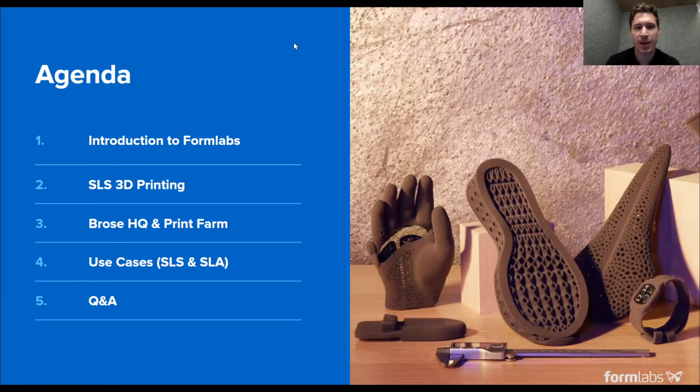Formlabs as a company, we are a global manufacturer of SLS and SLA 3D printers. We also manufacture all of our own resins, as well as some post-processing equipment. We started in 2012, and since then we have grown into a 135,000 install base, 40 plus materials, with a lot of parts being printed off of those. We have over 800 employees and offices all across the globe.

I'm based in Boston. We also have offices in Berlin, Budapest, and then a few in APAC.

A quick highlight into the current 3D printing portfolio. For those that may not know, we did recently release the Form 4 and Form 4B, our latest line in the stereolithography or SLA printers. We also have a large format SLA printer, as well as the associated washing and curing stations, which you need for post-processing for all sorts of end-use parts.

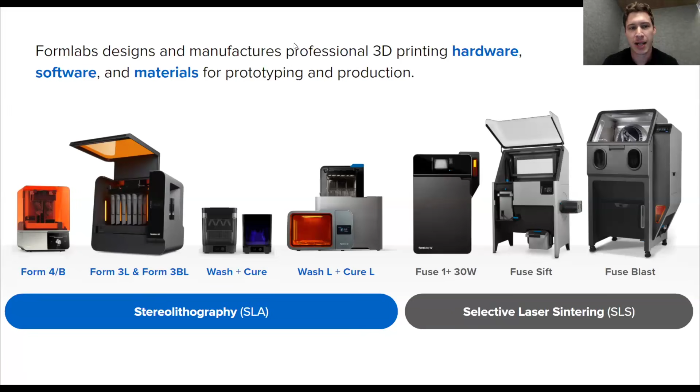On the SLS side, that is where we have the Fuse 1+, our SLS 3D printer that utilizes nylon powder. Then we have the Fuse Sift, which you can use to recycle, reuse, and reclaim your powder, and a Fuse Blast to get clean-to-the-touch parts every single time in about 15 minutes.

There are 3 main technologies within 3D printing: SLS, SLA, and FDM. I'm sure most of you have seen an FDM printer in the past - that is your filament extrusion, direct drive printer where you're producing all sorts of parts.

SLA is where Formlabs first made its name back in the early 2010s with the Form 1. That is your UV cure process utilizing a photopolymer or resin. We are printing ours upside down to get your end-use parts.

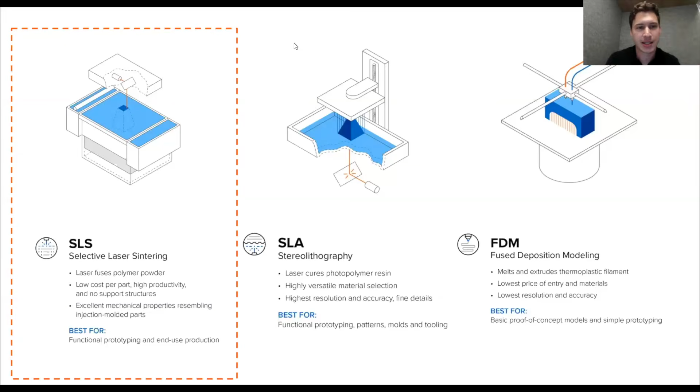SLS, which is what Matthias will be talking about in some of his parts, utilizes nylon powder, which is a thermoplastic. We use a 30-watt laser to basically preheat it and then add just enough energy so very specific areas and sections can get melted, sintered, and then hardened into very high accurate and repeatable parts.

When it comes to use cases, what you can do with each technology - obviously every single technology has its specialty, its use case. I think the best additive labs will have a mix of all 3 technologies. FDM, very quickly, is for basic prototyping and hobbyist applications. As you get into the SLA and SLS materials, you do have more certifications when it comes to biocompatibility.

If you're looking to do something for, say, surgical guides, or if you're trying to make a denture model or anything that requires direct contact with a person, that's where those certifications matter. As you grow into more of the engineering-based materials, that's when you are looking into functional prototyping and now production parts. So with that segue into production parts, I would like to introduce Matthias from Brose.

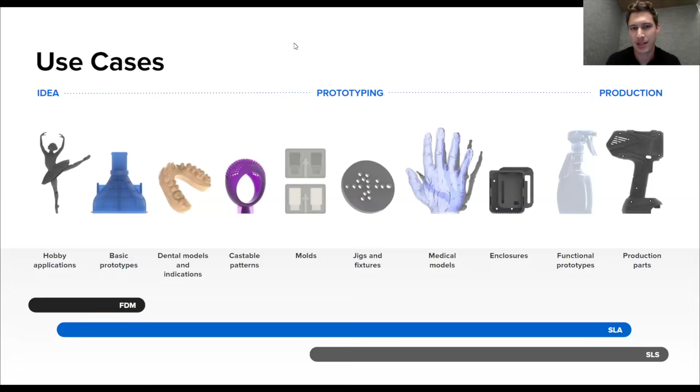Take it away. Yeah, hello everybody, thanks for having me. So quickly to my person - I'm with Brose for a little over 15 years. In my current role, I'm responsible for the seat prototyping of the North America region.

With that being said, in prototyping we have to, of course, go with the time, so we have additive technology here - this also falls under my umbrella. At Brose, we do have our headquarters for additive technology actually in Germany, where our general headquarters is also located. In that facility, we do some R&D work with the technology.

We're leveraging 3D printing a lot over here to reduce cost and time of manufacturing. We use that technology for prototype parts as well as for some serial production parts.

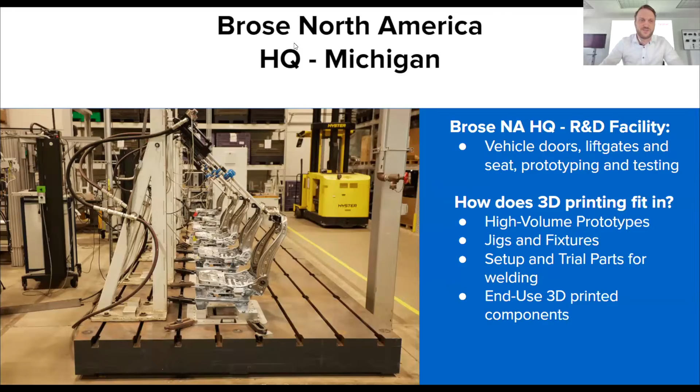I'm going to walk you through each one of them now. If you have questions, feel free to add them. Like Chris mentioned, one topic I won't answer is cost, so I hope you understand. Besides that, every question is very welcome.

When it comes to SLA technologies, we have basically all printers that Formlabs has available, SLA and SLS. We partner with Formlabs since a long time in our Germany location, basically since the first hours. That being said, most of our SLA applications are really used for rapid parts that we need. They're also used in prototyping applications, but we won't use them in serial applications.

The reason for that is only the UV resistance. There are some options out there to coat the parts, but that's not interesting for us overall, because for that we just use SLS technology. So the SLA technology itself helps us in many cases.

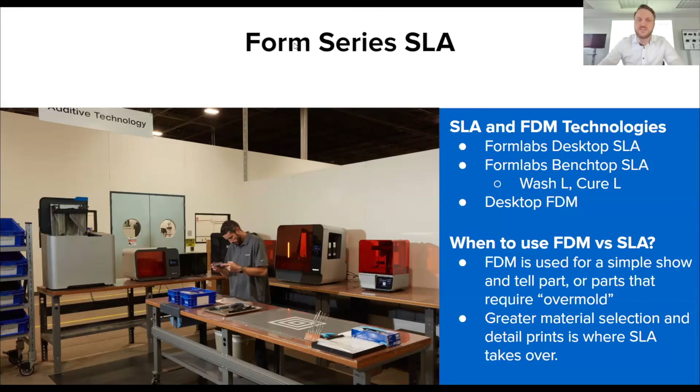I'm going to show you a handful of examples over here. One good example is the seat dampeners. The seat dampener is a component that helps us reduce noise level in the seat structures.

On this particular example, we needed 1,200 pieces. The problem was that the supplier making those parts for us currently in serial production is located in China. Therefore, we have a minimum order quantity that was way too high for us, up in the millions. So in order to avoid that problem, we decided to print them over here.

We do that also on some other parts, especially when shipping is a problem for us, especially customs, etc. Then we 3D print those parts. The great aspect for us with this technology is that you can change over from one material to another super quick. That allows us to print different styles of parts.

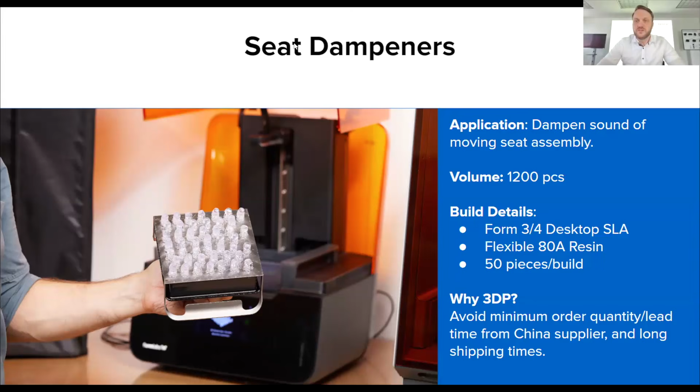Here you've seen a flexible, rubbery type of part. In the next example, you'll see a more rigid part. Those help us set up our weld station.

The problem for us is those weld fixtures are available way earlier than the physical parts, just because of manufacturing times and tooling times, etc. So in a traditional way, we always installed the fixtures, waited until the parts arrived, and then later had to perform the setup. That cost us a lot of time, and the waiting time was kind of useless for us, definitely a waste.

So we 3D print those parts on the SLA printers and then introduce them to the weld station. Sometimes we have to print a pretty significant size part. So we add puzzle pieces into the components and split it basically in half, print two halves, connect them together, glue them up with either super glue or resin, and then cure it in the UV chamber. That helps.

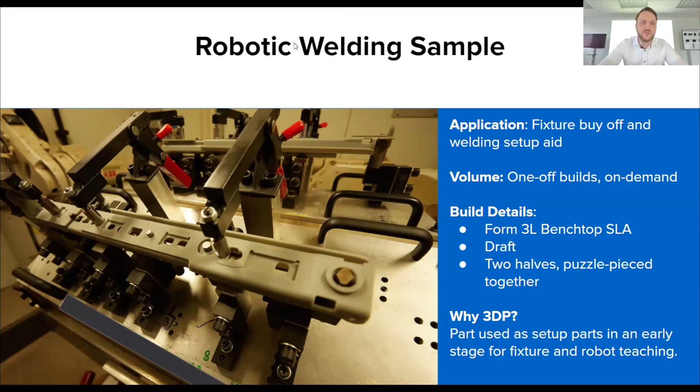On the next slide, you can see after we dial in the part with the 3D printed model, we can install the actual metal parts and weld those metal parts together. In this case, it was laser welding.

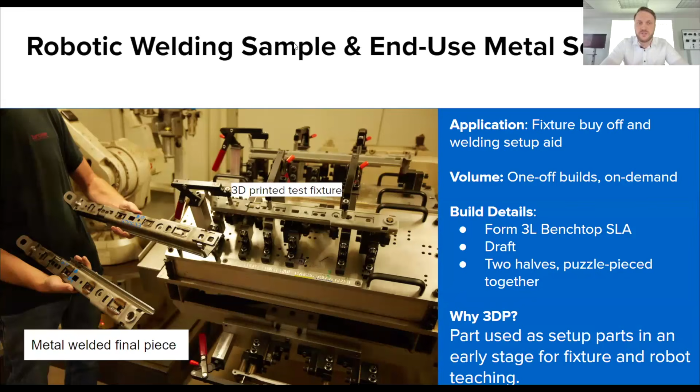Part of our Brose portfolio is that we also have a paint line. So when we introduce those metal printed parts into the paint line, here in the picture you can see both prototype parts as well as serial production parts. This is a snapshot out of our New Boston location, which I'll get into a little later.

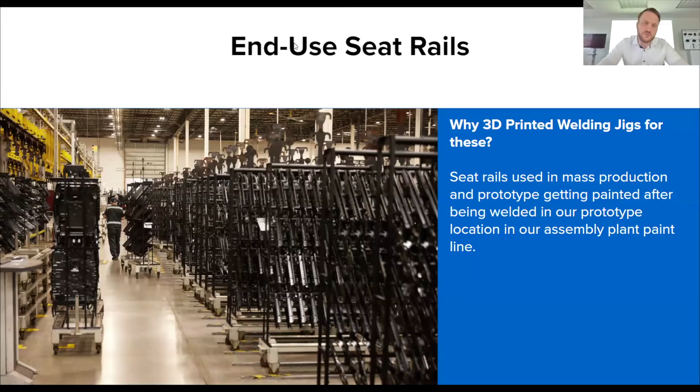When it comes to SLS, we have a fleet of SLS printers here, between the previous model Fuse 1 and the Fuse Plus. We also have a Sift and a media blaster.

For us, it was always very important to have a system that is low maintenance, because doing this here in the US, a high-cost country, we definitely have to watch the labor cost quite a lot. Formlabs is very creative when it comes to solving those kinds of problems with the Sift and the tumbler that they offer.

After we have a proof of concept with the SLA parts, we usually go into larger scale prints with SLS. A little different to a lot of other companies, when we talk prototype parts, we talk in the several hundreds. It's not that they have to print just 1 or 2 prototypes. It's usually somewhere between a minimum of 100 up to about 1,500 parts that we have to print. So that being said, it's quite some volume.

We also use the SLS technology for some end-use parts, which allows us to print high volumes. With the fleet we have on hand, we're able to maintain quite some heavy loads. I'll show you some examples in the next slides.

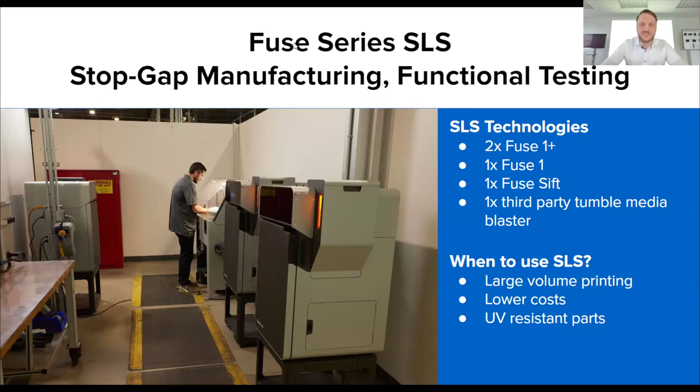This is a good example of prototype parts for us. We have to print 800 pieces for our current prototype build, and we can fit 50 pieces in one chamber. This part is actually a gearbox housing. The big win for us here is we've saved several thousands, tens of thousands of dollars actually for a tool, and can print it here ourselves.

Even better, in case we see a design change, we can adjust that right away. This is a fairly new part to us, so I wouldn't be surprised if there are changes coming. That always helps us, and we can trial parts way earlier. This also helps in another way, because the part later becomes necessary for our industrial engineering team, which also needs to make buy-offs on serial production tooling.

This usually has to happen as well with some physical parts, same like you have seen earlier with the weld fixture. In this particular case, we were able to provide to serial production already 3D printed housings, and they can try to mate them together like they would do later in the serial production line. That allows us to get a head start and also save some costs.

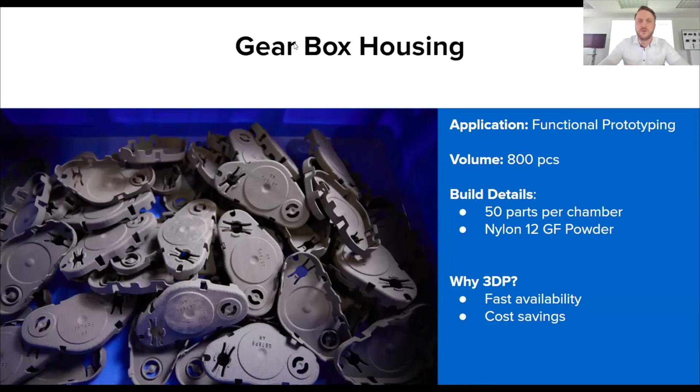Now going into serial production items, the clip you can see here is actually installed in a BMW X7. So if you see an X7 on the road, there's a Formlabs part in there that drives happily around. We have to print roughly 200,000 more of those parts.

So how did it come that we decided to use 3D printing for an end-use part? Of course, we had to go through the approval process with the customer, etc.

We need that as well, because we have prototyping and test in one location. So we were able to actually test the components. We were able to prove that they can withstand the lifetime of a vehicle. That helped us to show our OEM that this part is able to be used in the structure.

In addition to that, we wanted to implement the part rather quick. As you all know, it takes quite some time to get an injection molded tool ready. We would need several cavities in order to keep up with the quantity, and cooling lines have to get added to the tool, etc.

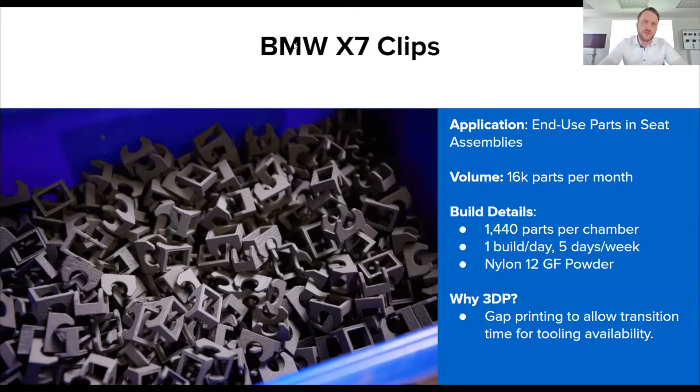That allows us as well to save a lot of money because we don't have to expedite the tool, and have no additional charges for the tooling time. We can make sure that we get the proper approvals for the tool, but we have also done parts that we printed all the way until the end of the lifetime.

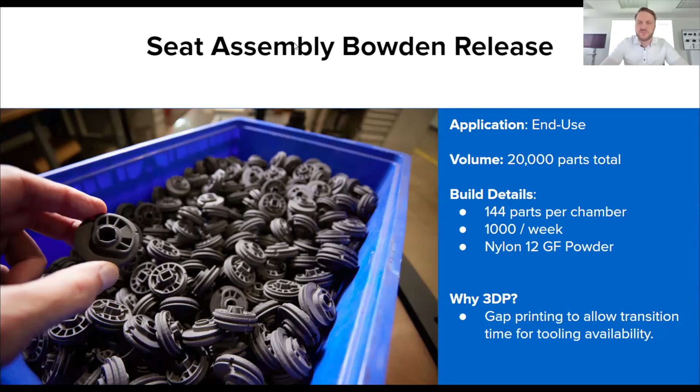Another example is this part here. This is actually a cable release pulley. We need to deliver 1,000 parts per week to our OEM. We could fit 144 parts into the chamber, and we went through a similar process like you have seen before on the previous slide.

Here we actually had to do an overmold, which is very complicated to do in an injection molded tool and very expensive. So we redesigned the parts to snap over the wires, and the flexible parts just have a tiny slot. When they come out as a green part, fresh out of the printer and still soft, we take them off the build plate, snap them over the wires, close the gap with additional resin, and then bake them in the oven to create a physical overmold. That helped us make this work, and it's where both technologies become really handy to use in combination.

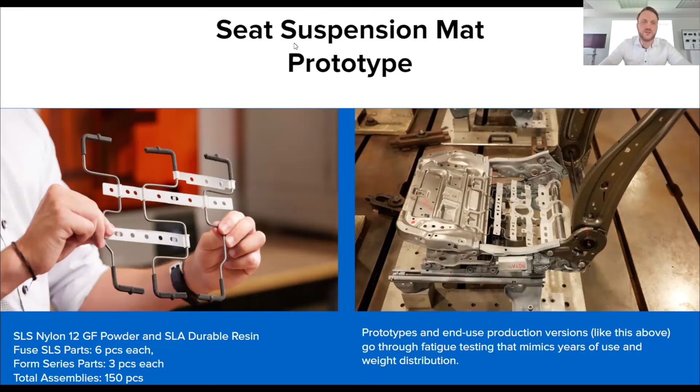Another item that helps us a lot is reverse engineering. In prototyping, we often run into an issue where we have parts that we have to modify physically to make them work, or when we build show samples for auto shows, etc. We can modify the part, scan it after the modification, and then reintroduce it to the printer to duplicate those parts. That helps cut down timing a lot. The scanning creates a 3D model, but not a drawing, so outsourcing that without a drawing the traditional way is always hard. That's something we don't have to worry about with this 3D printer—we can just feed it back into the printer directly.

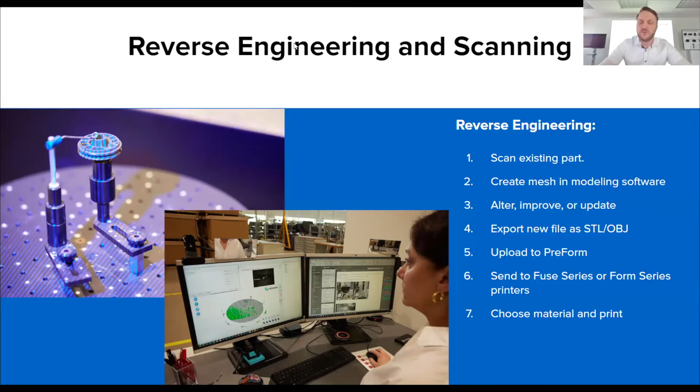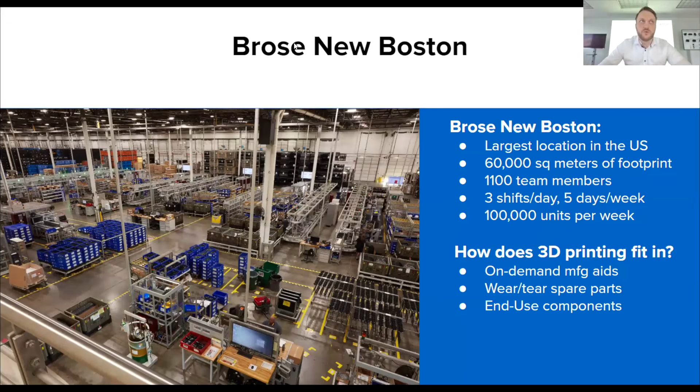Earlier I mentioned our New Boston location, so you can see the stats from the New Boston location right on the presentation. The New Boston location is helping us with painting our parts, but also uses additive technology. I wanted to show one example here. There are many other use cases where we use it for spare parts for maintenance, other components for jigs to make measurements easier, and operational checks we implemented with go, no-go gauges, etc. But I think this example is pretty interesting.

We always had a problem with our end-of-line testers. An end-of-line tester is a system that checks the functionality of a seat structure at the end of a production line to make sure the product is delivered in good quality to our OEMs. It connects with those gray connectors directly to the motor, operates the seat structure to make sure the function is given, and takes some measurements. After the test is completed, the operator has to unhook the structure again from the cable, and if that happens, everything is good.

But sometimes that does not happen, and we run into the problem that the cable gets ripped out. Two cases can happen: either the cable rips out on our machine, meaning downtime to fix that one pallet, or the connector breaks off on the motor, which is more severe, because if not caught right away, that could mean we'd send a faulty product to the customer—something we want to avoid.

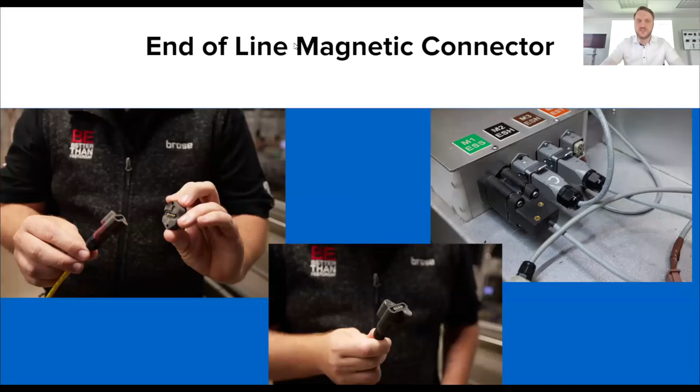That being said, we developed a 3D printed connector with a magnet break-off. As you can see in the pictures, there's a magnet holding the parts together, so if it isn't disconnected, the whole connector comes off without breaking anything. In the first step, you can see the employee has the seat structure on the pallet, connected to the end-of-line tester. In the second picture, you see what happens if he lifts it off without disconnecting the cable. In the third picture, you can see the pigtail bounce around because the magnetic connector helps—that saved us a lot of downtime.

The cables come pre-manufactured from one of our suppliers, the original ones, and they come with a quite hefty price tag. So we were also able to save some costs and eliminate a quality problem.